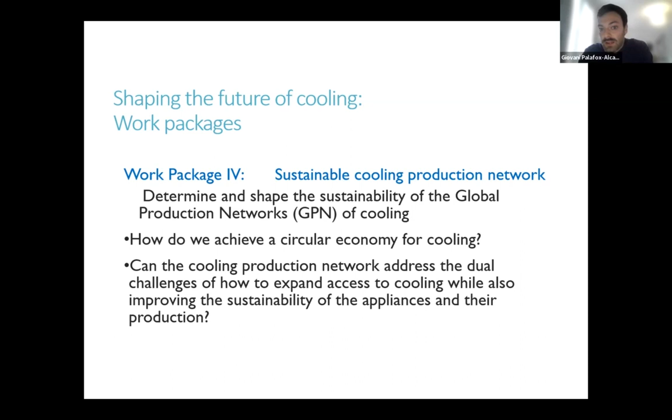As part of the Future of Cooling programme, we have different work packages, and I'm part of number 4, which is around sustainable cooling production networks. So we're trying to determine and shape the sustainability of how we manufacture and produce cooling, how we move it towards a circular economy, and what are the challenges of addressing that demand for cooling, because the demand for cooling is increasing at a very high pace, whilst at the same time we make it sustainable for the environment.

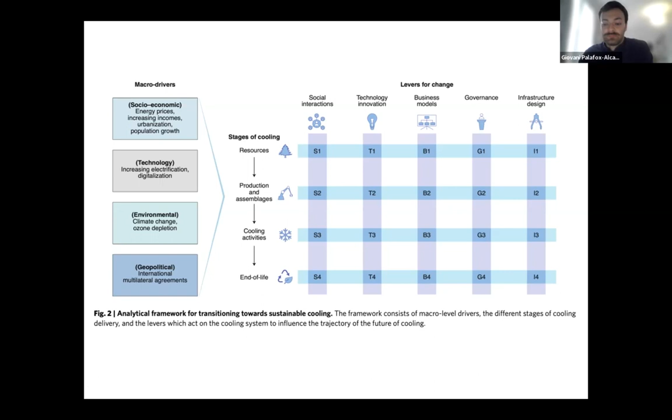The first part of the presentation will be talking about a framework that we've developed for moving cooling production or manufacturing towards a circular economy. And the second part will be on current research and future work as well.

The first bit is why cooling? Why is it important? So we know that over 1 billion people currently are facing a risk of lack of access to cooling. Every year we hear in the news that people are vulnerable to extreme heat, and increasingly in countries where heat has not been traditionally a weather concern, it's becoming more and more important.

The demand for cooling is increasing exponentially, so it's expected that 10 air conditioners are going to be sold every second for the next 30 years, which means it's a massive amount of air conditioners and resources that go into that.

And again, the demand for energy specifically for cooling will be equivalent to that of the US, Europe, and Japan combined by 2050. It's becoming more and more critical for human activities, so we're relying on cooling for our food, for our vaccine chains. It's also a great contributor of global warming emissions. Estimations vary from 7 to 15%.

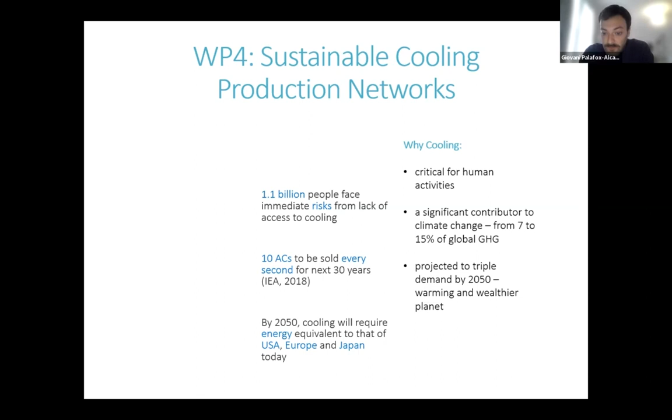And the demand for cooling is expected to triple, and at some point it will surpass the demand for heating, which contributes to a cycle, right? So the more cooling we use, the more global warming we have, and the more global warming we have, the more cooling we need. And finally, it is not a symbol of opulence anymore. It's increasingly important for human welfare.

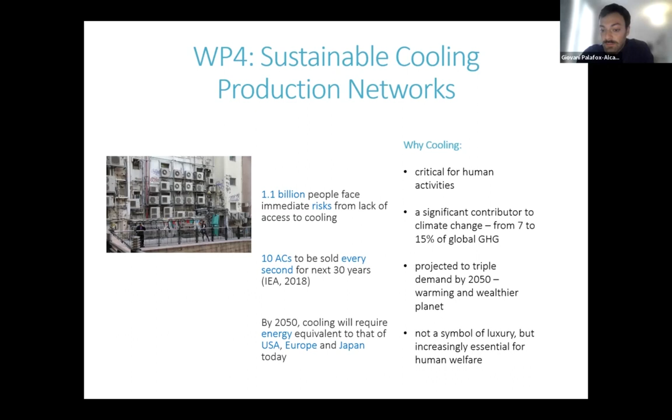So the objective of this review that I've made was to address this question: what does the literature tell us about the different stages of when we manufacture cooling, and how can we transition towards a circular economy? The key output was a map of the full system of cooling production using two approaches: the circular economy and global production networks.

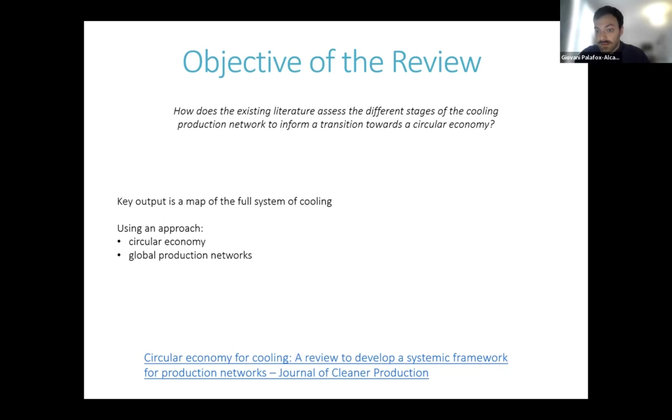Global production networks are basically the set of actors, not necessarily only companies, but also different actors such as government and other non-economic actors that contribute to the production of a certain good or service. And they're normally arranged around the world. It goes a bit beyond simply a supply chain, so it involves regulations, policymakers, and so on.

This review has been published very recently in the Journal of Cleaner Production, so you can always have a read of it. And it focused on active cooling. We call active cooling cooling that requires energy to function, so basically air conditioners, refrigerators, and so on.

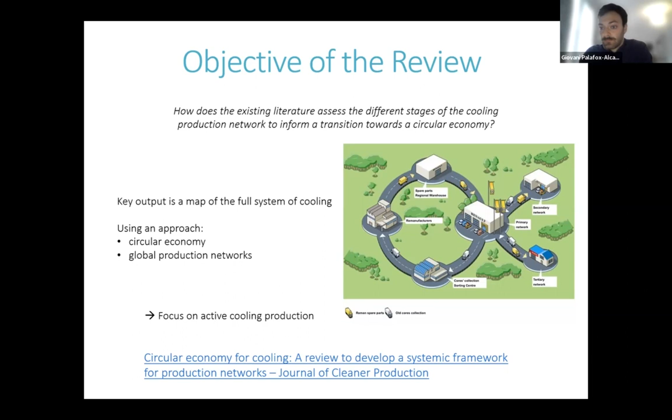First, the search strategy. Quickly, I'll go through this. I used literature from 3 different databases using 3 concepts: circular economy, other concepts around cooling, and global production networks, supply chains, and so on. After screening and different criteria used, we came down to only 69 publications that really contribute to how the circular economy can be embedded in the production of cooling. And a map was created.

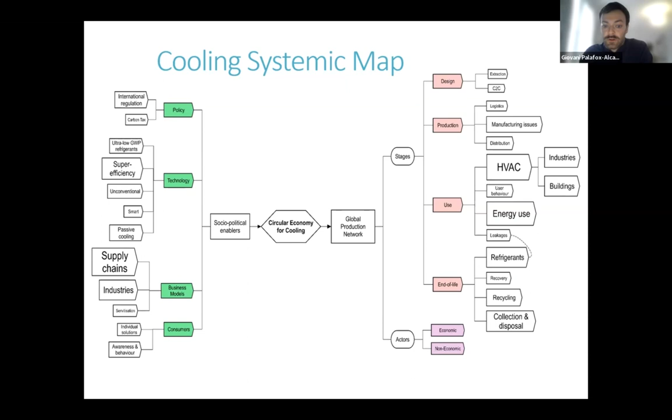First, the left-hand side talks about socio-political enablers, and I'll talk about this more deeply in a second. And then the right-hand side are the stages of cooling production and the actors involved. Now, first, the left-hand side, we decided to categorize the existing literature in 4 different categories. So first of all, we have policymakers, those who influence directly or indirectly cooling, such as international regulations, such as the Paris Agreement, reaching net zero, the Montreal Protocol, and so on.

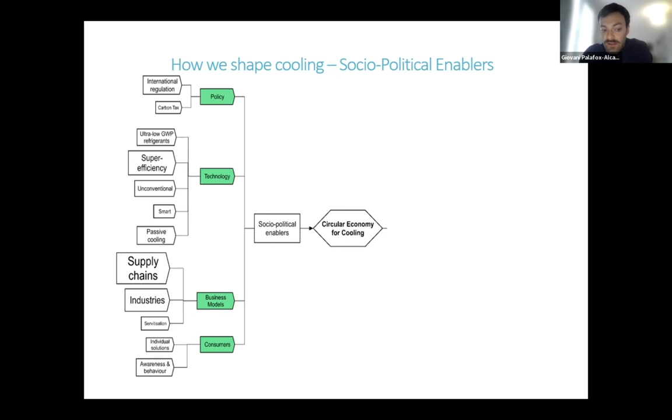Technology, that means moving towards super efficient air conditioners, for example, and using low global warming potential refrigerants, and also the use of passive cooling, so cooling that doesn't require energy to function. Then we moved on to business models, and servitisation was one of the important ones, and I'll talk about that a bit more in detail. And finally, consumers, so the end users who are demanding the use of cooling, how they can influence the production of it.

Now, on the right-hand side, again, these are the global production networks and the main stages. The first couple were design and production, and how cooling is usually not designed to be easily recovered. Cooling appliances, I mean, so air conditioners are normally not recycled or recovered, for example. They end up in landfill. But that translates again to the management at their end of life. How the production, manufacturing issues, the use of different resources, why different companies decide to manufacture in different countries.

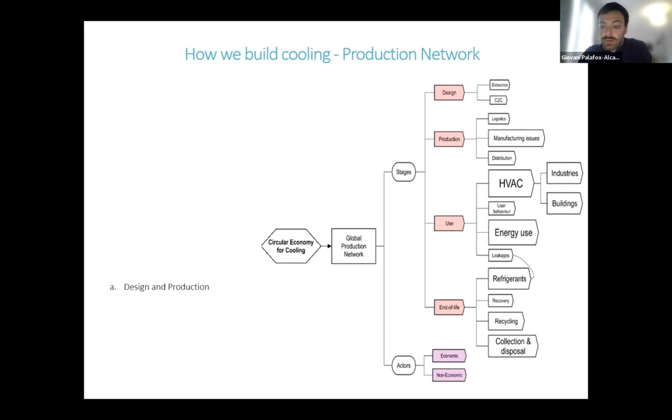The third one is about use. Energy, it's a big player there. Refrigerants as well, and how it's increasingly more important to take into account the leakages of those refrigerants into the atmosphere. For example, I wanted to show this photo of a refrigerator just being abandoned on the street, not far away from where I live. So policy to tackle this, it's important. We sometimes call these zombie refrigerators because they have very dirty refrigerant gases inside them, and they're a threat to the environment just by sitting there on the road.

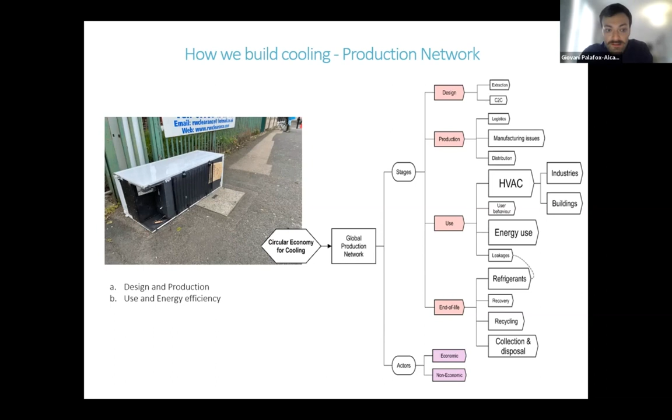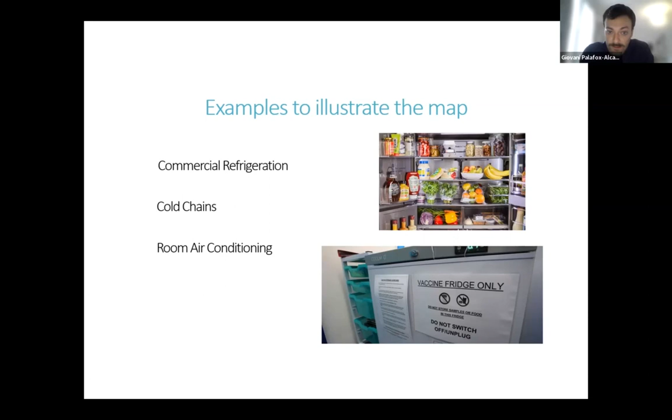To illustrate this framework, the paper talks about 3 different examples, and I'll just go through one, which is the cold chains. And cold chains are basically understood as the food supply chain and normally the vaccine supply chain. They're the ones that have more literature on there. This is what the framework looks like when considering all the literature that went into it. So we know that there are lots of international regulations that influence cold chains. So the United Nations Sustainable Development Goals have a direct impact on how food is produced and transported, and how it needs to be cold and preserved to avoid any food spoiling.

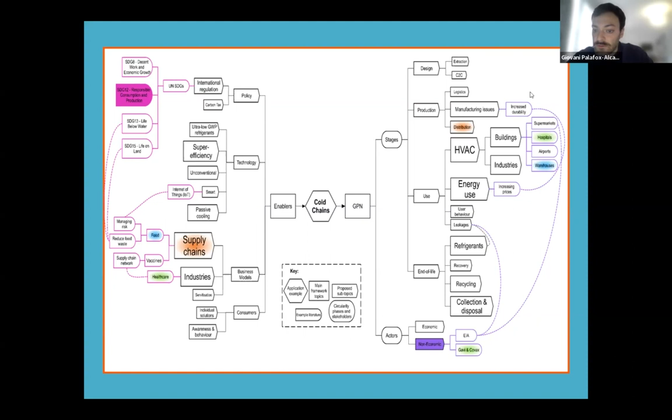And then the vaccine supply chain is very related to buildings. For example, on the right-hand side, on the stages of the use of cooling, how it's transported, how it's used in different hospitals, for example, in warehouses. And there are, for example, other studies by non-economic actors, such as the Environmental Investigation Agency, looking into the leakages of refrigerants in supermarkets, which is a massive threat.

I wanted to show that the potential of decarbonizing cooling is quite big. Moving towards a circular economy can help avoid a good amount of carbon emissions. We know that by 2050, the global demand for cooling is going to escalate massively. And if we address these problems now by mitigating them, we can avoid quite a big amount of carbon emissions relative to a business as usual scenario.

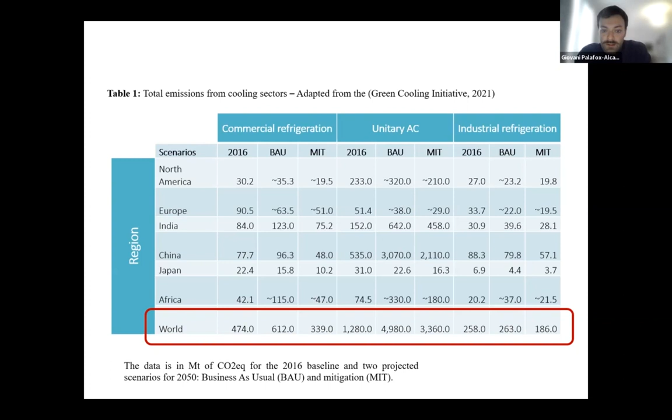So in conclusion, there are four main enablers that could help cooling production move to a circular economy. So we talked about policy, how to make it more strict, and how to address the problem of refrigerant gases, so F-gases that have very high global warming potential. Then we see technology as developing, so being more efficient. But then there is a trade-off of technology that uses natural gases, but it's sometimes not as efficient as the traditional F-gas technology. So transitioning towards that. Business models, that's mainly servitisation, and I will talk about that in a second. Finally, consumers and how they become more aware of cooling demand and how it's consuming a lot of resources and energy and so on.

So there are three main actions to tackle: avoiding raw material extraction. So apart from refrigerants, which is a big concern, plastics and metals are used in cooling appliances, which fall within e-waste. And designing all these appliances to recover those materials, introduce them back into the consumption system. It's really important. We need to eliminate incineration and landfill, definitely, from cooling appliances. They end up sitting in landfills and being a massive threat to the environment.

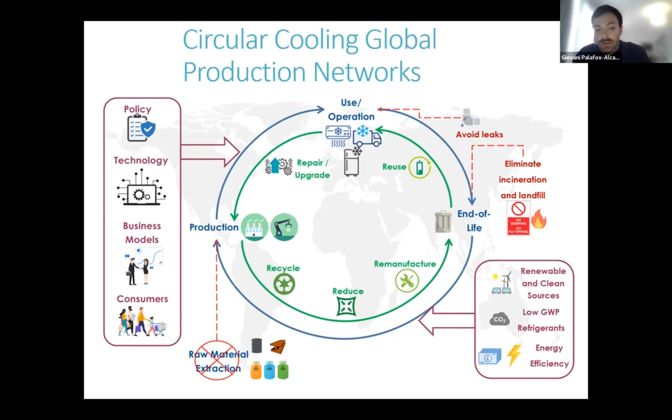And then it's a combination of different solutions. Some of them, Jesus talked about already. It's about cleaning the electricity grid, using low global warming potential refrigerants, natural refrigerants, and making the appliances more energy efficient. Okay, so I would like to move on to what my current work is about at the moment and what I'm planning to work on in the future.

First one is what we've mentioned, the cooling as a service on repeated times. That falls within the business model levers of change. All the phases are involved, all the stages of cooling are involved, but mainly it's the cooling activities or the use of cooling. But it definitely influences all the others indirectly.

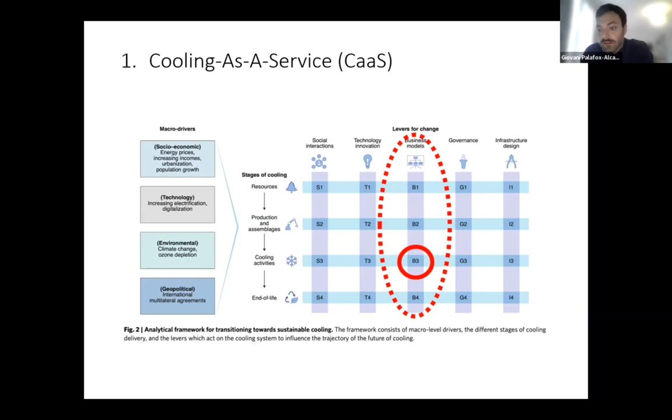So cooling as a service, the value proposition falls in making cooling more easily accessible, especially for vulnerable people around the world. And it helps end users avoid expensive capital expenses at the beginning of acquiring a new cooling appliance. The company that offers the service, the cooling as a service, retains the assets and operates them.

So it's in their best interest to use the most efficient ones, the cleaner ones, to keep them well maintained and to extend the performance as long as possible. So that definitely avoids the production of millions of new cooling appliances. The business model could be very similar to a district cooling layout, but the main difference is that this is a business model rather than a new utility.

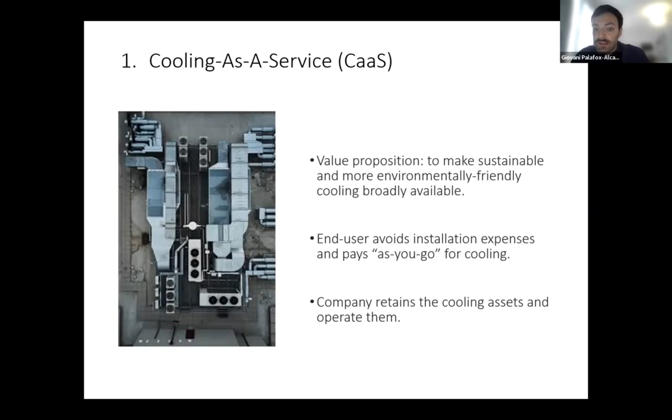So the research that I'm working on at the moment has several objectives: trying to gather as much information on cooling as a service development around the world, creating a timeline for that, identifying differences in adoption across sectors and geographies. And one of the unique things about cooling as a service is that it works very well in different conditions and different contexts.

So, for example, I've interacted with a service provider in rural markets in Nigeria, and in the markets the refrigerators are powered by solar panels, and it works perfectly there because there is no sort of incumbency technology that makes it difficult to transition to this new business model.

And it also works well, for example, in Singapore, where you have a massive amount of air conditioners already working there, and companies are increasingly worried about the maintenance costs and the electricity and efficiency costs of using so much cooling. I've gathered a few interviews. So the methodology for this work is gathering interviews across different sectors, different geographies. I have three different categories of interviewees.

I'm focusing first of all on the business model approach, how they capture value, how they create it, and then talking about enablers, things that make it easier for the cooling as a service business model to work and be adopted, and also the challenges or barriers for the business model to develop. And those interviews helped shape a barriers index and an enablers index for cooling as a service adoption in different countries.

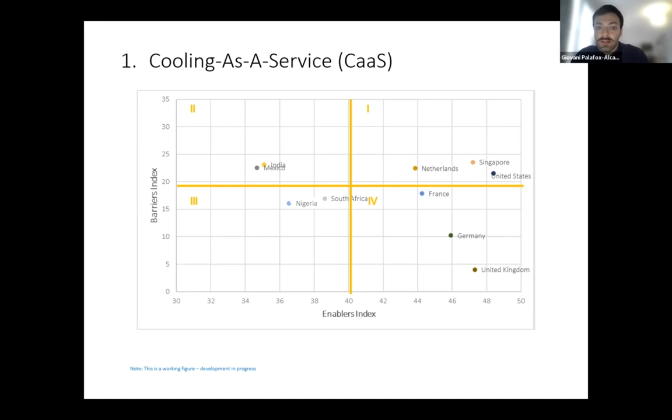So, in conclusion, that paper, those interviews will help shape and describe the different archetypes of these countries that are moving into the cooling as a service business model. But again, this is ongoing work. And finally, future work is about mapping the geographies and intensities of cooling production around the world. It falls within all the stages of the future of cooling framework.

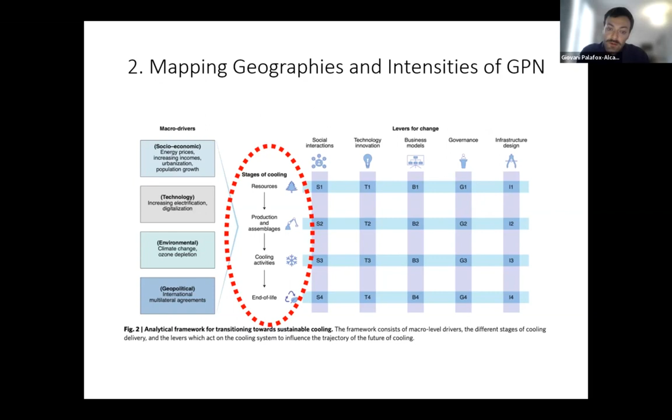And it's mainly involving speaking to actors, mainly the manufacturers of cooling appliances, big companies, and why, how, where, and how much they manufacture around the world. And what are the reasons behind it? Is it policy? Is it cheap labor? Access to resources, access to different markets, etc.